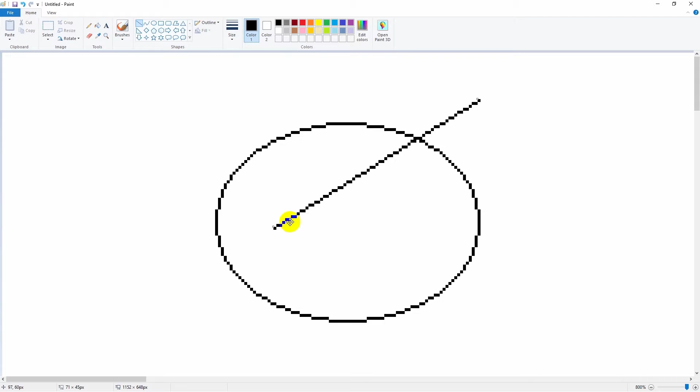Lines are the same way. As long as this is small enough, it looks like a smooth line. But as soon as the pixels are blown up, you can see that it's not really a smooth line - it's a grid of black and white dots.

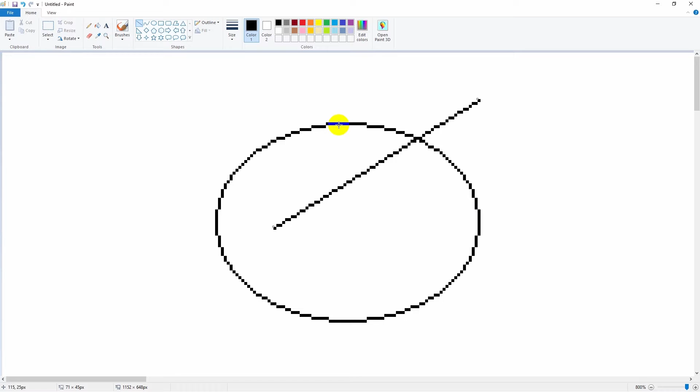Now, this is great for creating images because, like I said, as long as you have the pixels small enough, your eye doesn't really see them. But it's no good for creating artwork for a CNC machine, because the CNC machine doesn't just need to know in this grid where the different colors are - it needs a path that it can follow.

So if we go over and do the same thing in Inkscape, let me draw an ellipse. Now when it's small, it looks the same as what we got in Microsoft Paint. But if we zoom in, you can see that as we zoom in, the line stays smooth. In fact, we can zoom in as far as we want, and no matter how far we zoom in, the line will still be smooth.

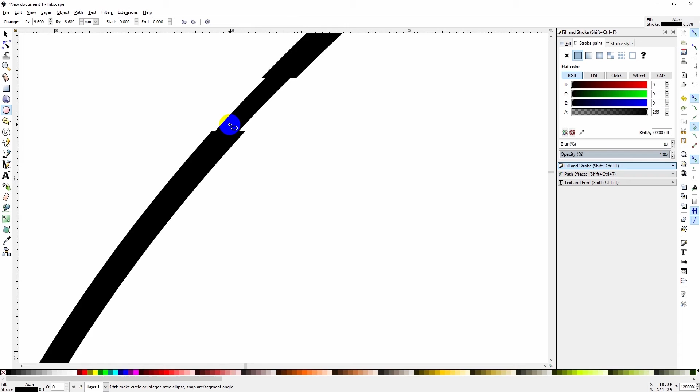Because in the underlying data that the software is working with, this is not a sea of pixels, it's not a grid of black and white dots. It's actually a mathematical shape defining the ellipse, and it uses what's called a path that defines the actual line. So for a CNC machine, this is perfect, because we have a line that we can just output for the machine to follow.

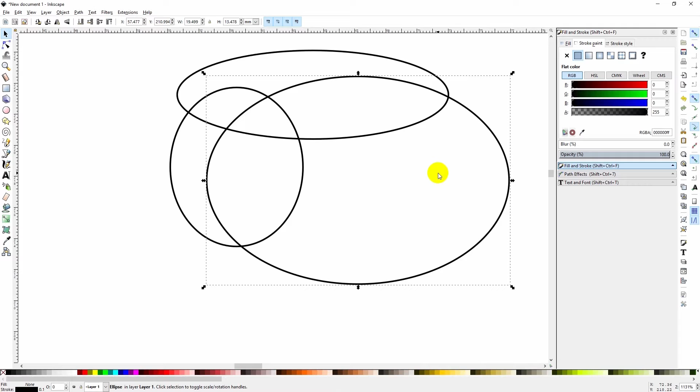Now, the other thing that's great about this is that even after you've drawn overlapping shapes, each one of these shapes is still defined as a mathematical shape. So I can go back to this first ellipse and I can edit it. I can move it around, I can change the shape of it, I can skew it. And we're going to take advantage of this when we create our artwork for engraving.

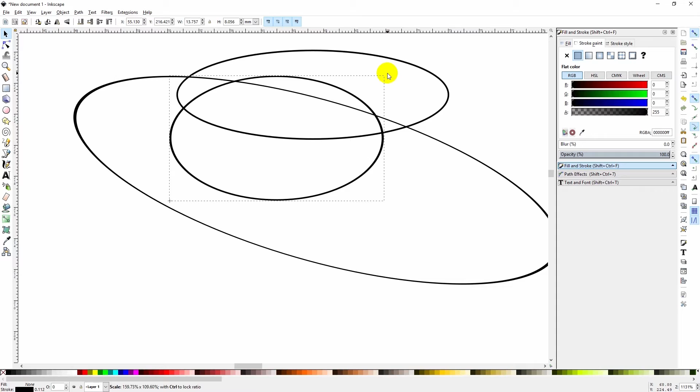And so every one of these, again, continues to be a mathematical definition and not just a bunch of pixels. If you have overlapping shapes that you've already laid down in other artwork packages like Microsoft Paint, you can't really go back and do this, because you don't really have the definition of what that object is. You just have the colored pixels in place, and you don't have the ability to go back and do this kind of editing. Well, that's kind of the basics of why we use vector graphics software like Inkscape to do engraving graphics.

Now let's actually define something to engrave. Let's create a version of the Clough42 logo that we can use to engrave as a maker mark on tools.

I've just opened up a new document here in Inkscape, and you can see the empty page. We're not really creating a page of artwork, so I don't want this here. I'll click over here on the little document with a wrench, and this will pop up the document properties, and I will click Show Page Border.

I'll uncheck that to get rid of it. Now the Clough42 logo is a text mark, it's just made up of text, so I'll click the text tool. I'll click here and type Clough. Now I'll highlight all of that, and I want to change the properties of the text. The little T button over here on the right opens up the text and font window. I'll choose my font, which is Agency FB, bold condensed, and let's make it big, 144 point, and we click Apply.

Okay, so we've got that, and let's create one more piece of text here, which is the 42, and we'll do exactly the same thing. That's also Agency FB, bold condensed, 144 point, apply. Okay, so now we've got these two things.

Now if you've taken a close look at the logo before, you know that the Clough is italic and it lines up and overlaps with this angle here on the 4. So if I just click on the object here, I've gone back to the pointer tool, I get these handles to be able to stretch it. And if I click again, then I get handles to be able to skew and rotate. So I can just grab this top handle and skew it over.

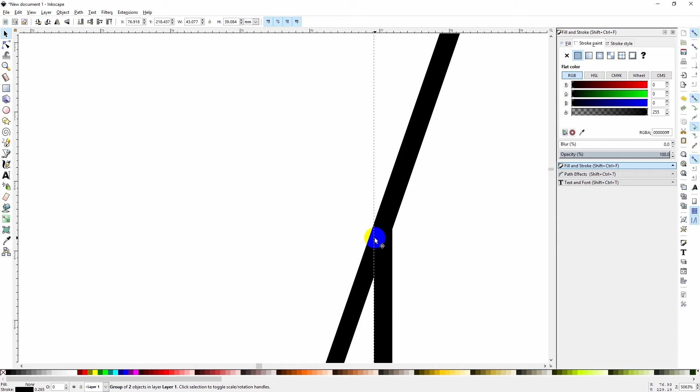So I'll take this my pointer tool, and I'll take the 42 and slide it over so that it lines up. And in fact, as it came into place, it snapped into place right there. So we can go in here and see that those letters are perfectly lined up on top of each other. Make sure the corners don't have anything weird going on. Same thing right down here. And I would say that is close enough.

Okay, now that I have these overlapping, I need to combine the H and the 4 into exactly one path. Right now you can see I have separate paths that are overlapping, but these lines in the middle here, I don't want them to be there. So I'm going to click on the Clough, and right now it's one set of paths that are all grouped together, and I'll just go up here under Object, and say Ungroup.

And so now I have separate selectable paths for each letter. I'll do the same thing on the 42, Object, Ungroup. And so now I can select just the H, hold Shift, select just the 4, and now I can go up here to Path and say Union. And when I do that, it's going to take these two overlapping paths and it's going to convert them into just one path that encloses the same area.

So I say Path, Union, and you can see now the H and the 4 have become one. Now I'll just rubber band select everything here, and I will say Object, Group. So now I have this Clough42 with my stylized H and 4 as one group that I can move around independently. Okay, let's add some more elements to this.

Let me grab the text tool, and let's say USA 2019. I like to mark the tools with the date. So go back over here to Text and Font. We'll use the same Agency FB bold condensed, and I want the size a little bigger than that.

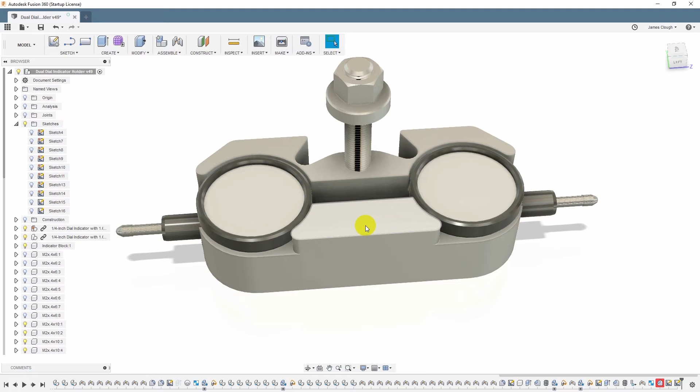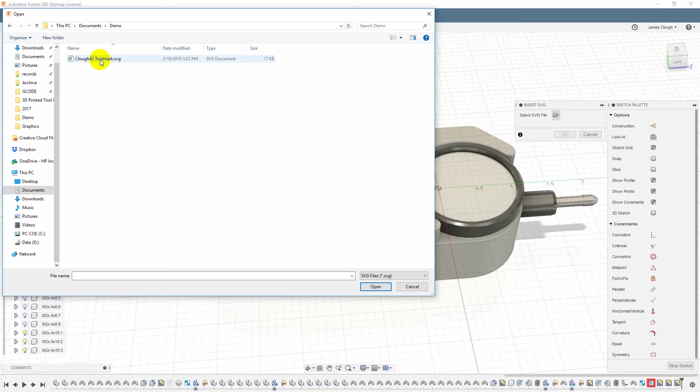So to create the engraving, we need a sketch. So I'll just right-click on this surface and say Create Sketch. Now once I have a sketch, I'll go up to the Insert menu and say Insert SVG. Now I can just click on the file folder to select a file, and I'll select this Clough42 toolmark.svg file that we just exported from Inkscape.

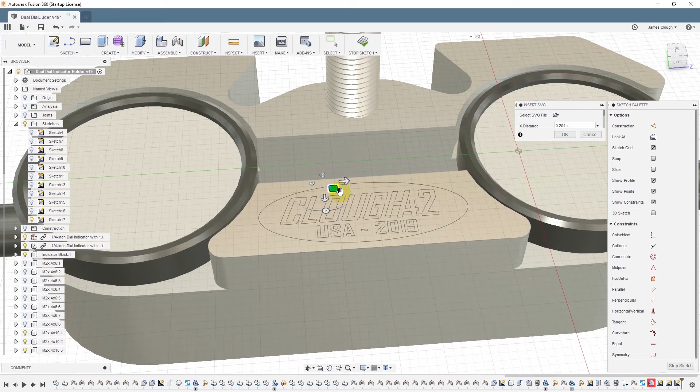And there it is. We need to get it into position. Let me rotate it 90 degrees here and move it onto that surface. It's too big, so I'll use the hand tool to resize it. Just a little smaller. Let me use the look at feature on the sketch, which rotated in a funny angle. Okay.

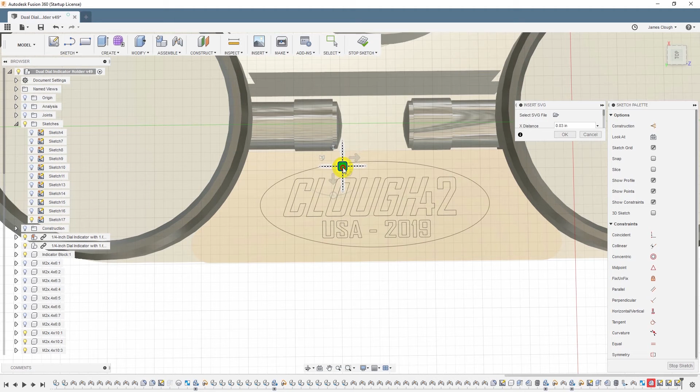I'll just use the handles and move this around and get it right where I want it. That looks pretty good. So I'll say OK. And now those lines become a part of the sketch, and I can say Stop Sketch. Now we have a sketch on this surface that we can use for engraving.

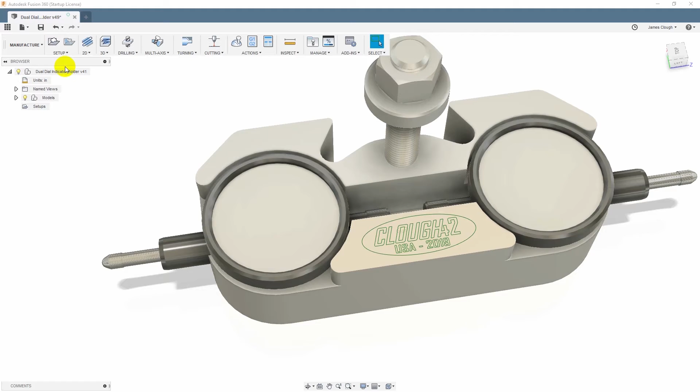To engrave, we'll just go over to the Manufacture workspace, and the first thing we need is to create a setup. So new setup, and the model, I'll select just the body so it'll ignore everything else.

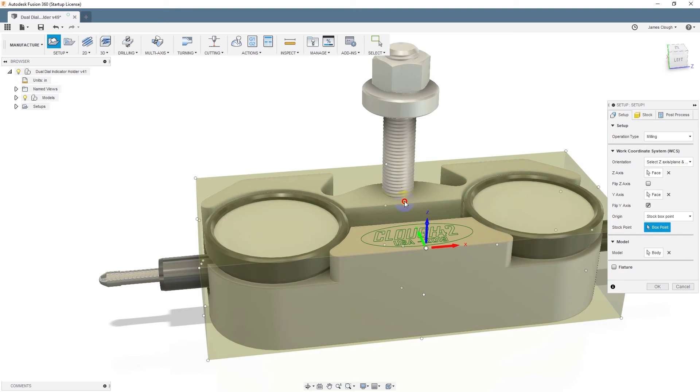Let's get our Z direction going the right way. Okay, so now our coordinate system's going the right direction, and let's select the center of this so we can center up on it. Okay, so there's our coordinate system for stock. We'll just say that there's no extra stock because we're just going to mill, or just going to engrave directly on this part. Okay, that's our setup.

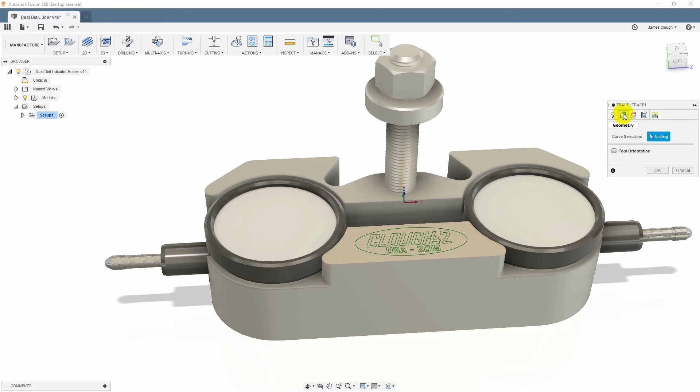So we can come in here and say 2D trace. And for the model that we want to trace, the geometry, we can just select all the lines that we would like to trace. Okay, those are all the lines.

So let's go and select a tool. Now for the engraving tool, we'll go ahead and just create a new tool. There's not a diamond drag engraver in here, but the easiest thing to choose is a chamfer mill. And we'll just set the shaft diameter to 0.25.

Set the taper angle to 45 degrees, and the diameter to 0.25. That will be close enough.

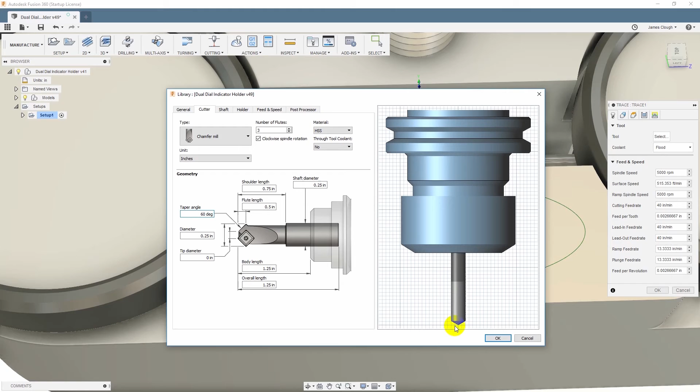Now, this is what the tip will look like if we're using a 90 degree tool. If we're using a 120 degree tool, then we would need to change this to 60. That gives us the correct geometry at the end. The only reason that matters is so that Fusion can keep track of whether we're running into anything with the side of the tool.

So let's go up to feed and speed. Now, in reality, this thing's not going to be spinning, but I've got to put something in here. I'll just say 30 RPM, and the cutting feed rate, let's make this 30 inches a minute. Same with the lead in, lead out, and the ramp, though it doesn't really matter. Same with the plunge, doesn't matter. We'll just set these all to 30 inches per minute. Now, it thinks this thing has teeth, but ultimately it doesn't matter.

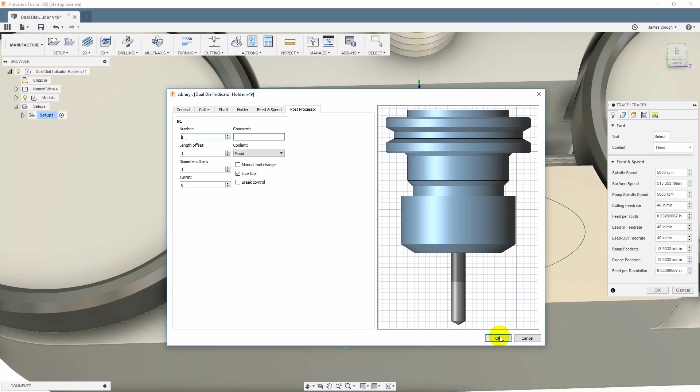And then we can assign a tool number in the post processor. I'm not going to bother with that right now. So we have that defined.

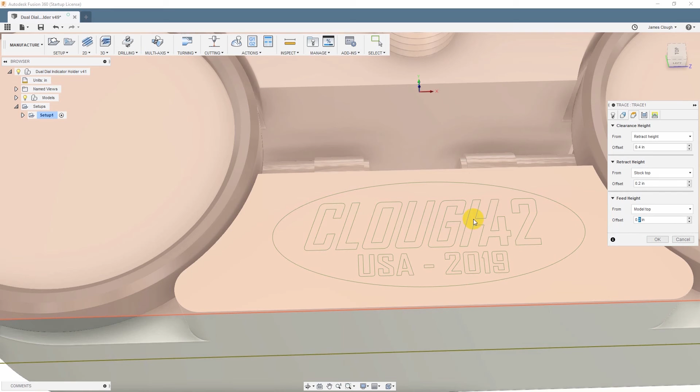We've defined our geometry. So in the heights tab, by default, the feed height - this is the height at which it switches from rapid to feed as the tool's coming down - is 200 thousandths. And that often really slows things down because the last 200 thousandths as the tool is descending towards the part are done a lot slower.

So I could change this to something like 50 thousandths. If you feel like living dangerously, you can make this even smaller so that the tool will rapid even closer to the work before it slows down. The nice thing about having it slow down earlier is you have time to see if things are going wrong and you can hit the emergency stop. But the downside is it makes everything take longer.

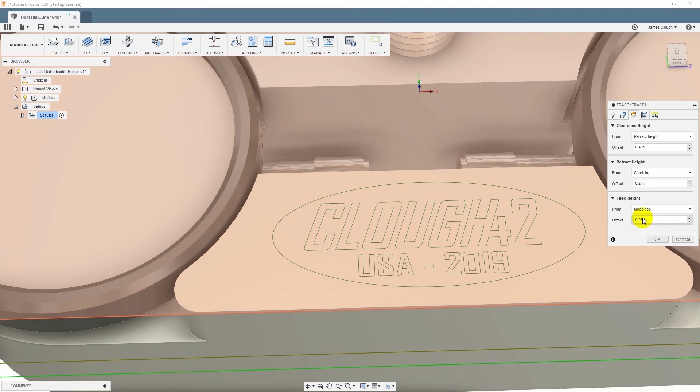So then on the passes tab, we want to turn off chamfer because we're not cutting a chamfer. It's on because we chose a chamfer mill.

And then we'll go into stock to leave. Now if we set stock to leave at 0 and 0, it will just touch the tool to the work. We don't want that. We want to compress the spring of the diamond drag engraver. So on the axial stock to leave, I'm going to say minus 0.05 because I'd like to compress the spring by 50 thousandths.

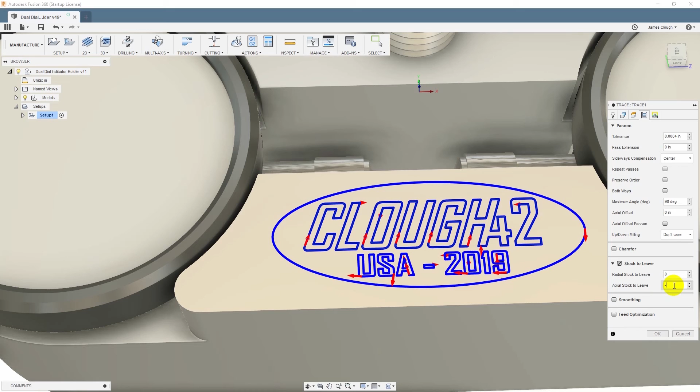And then we just need to make sure that on our transitions we don't have a lead in or lead out. We'd like to just plunge directly into the work. We don't want to come scooping in from the side to scratch it up. Click OK, and that should be it. That is our tool path.

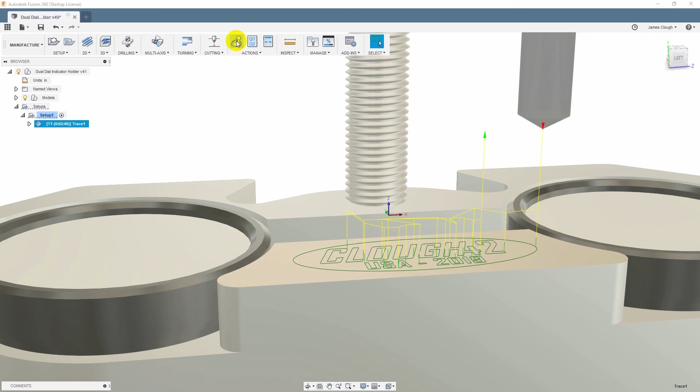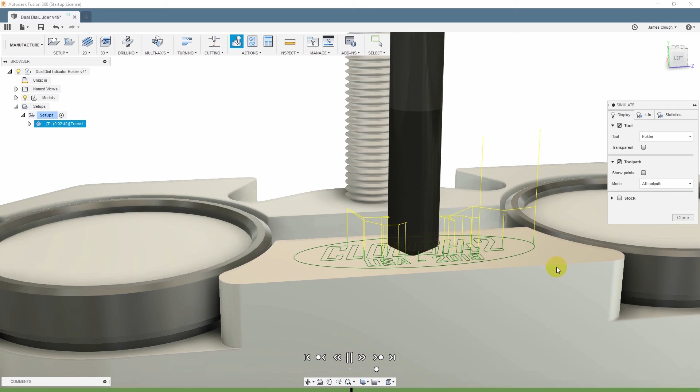Let's simulate it and see what it's going to do. The tool is going to come down, and now it's showing it here embedded into the workpiece. Now it's not really embedded because it's spring loaded and the spring is going to compress. Then the tip is just going to drag over the top of the workpiece, actually engraving the artwork. You can turn on the stock and turn off the modeling and kind of see what it's doing here.

And there is our engraving.

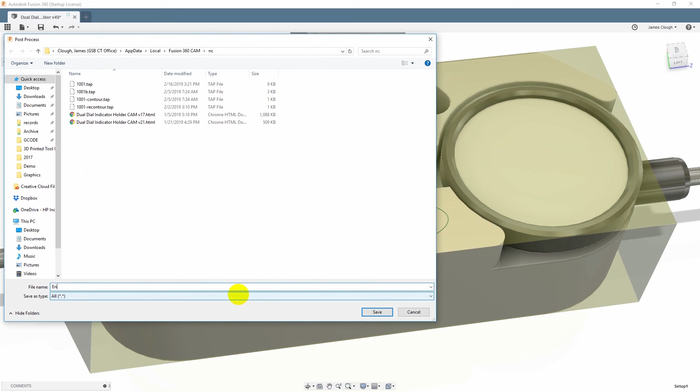Now that we've got the toolpath defined, all we have to do is run the post processor to create the G-code. Post this out. And there's the G-code.

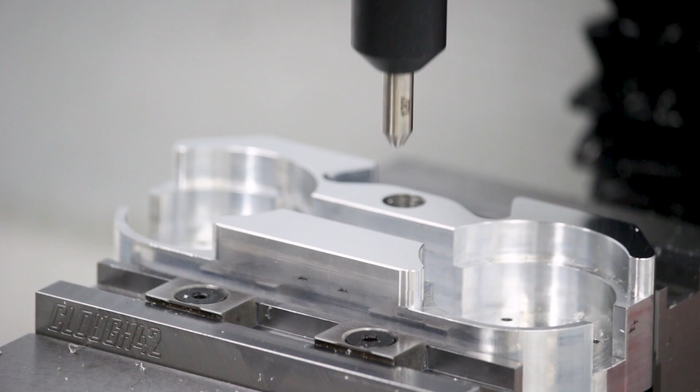And once we have the G-code, we just have to load it into the mill and run it. As the G-code tells the mill to dive below the surface, of course the tip isn't actually going very far into the surface. Instead, the spring in the tool is compressing, and that's what provides and evens out the cutting force. The more negative the Z-coordinate, the more cutting force there is, up to, of course, a limit.

Eventually the tool will bottom out, and you definitely don't want to do that, so you want to measure how much compression you have. But generally it's 3/8 to half an inch on tools like this. You just need to experiment and figure out for a given material, cutting speed, and diamond how much force you need to get the effect that you want.

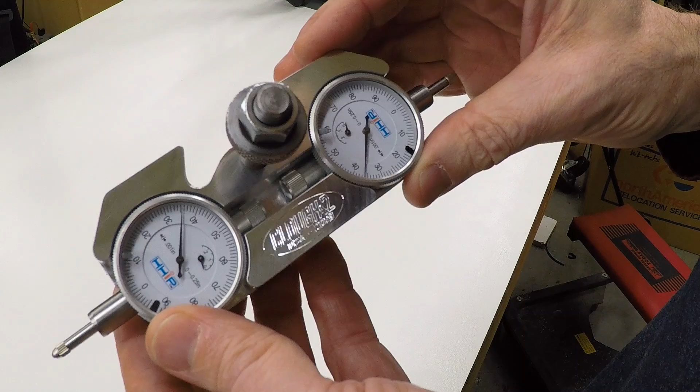As you can see, the results look pretty good. You will definitely be seeing this tool again in future videos.